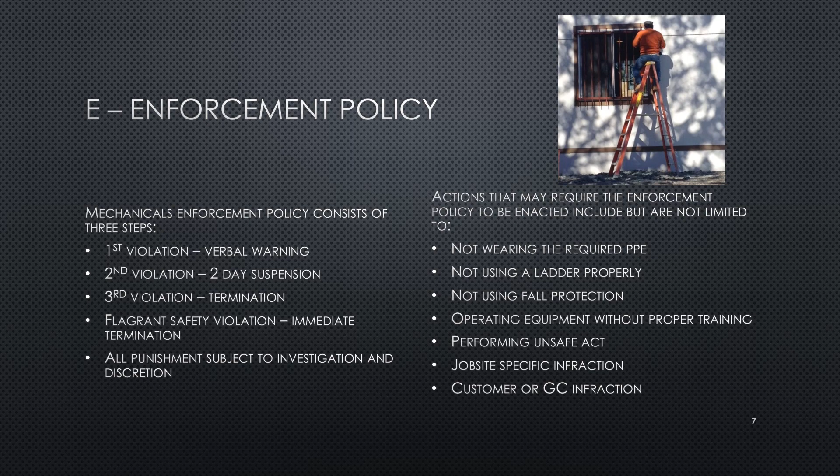Employee safety orientation may include the following: new employee safety orientation, job site specific safety orientation, and or customer specific safety orientation.

Mechanical is required to provide safety training to its employees. OSHA compliance training pertains to these standards: 29 CFR 1910 for general industry and 29 CFR 1926 for the construction industry. Training specific to our company includes new employee safety orientation, daily safety training, high-risk activity training, weekly toolbox talks, task-specific training, and customer or general contractor specific training.

Although uncommon, OSHA may inspect a job site based on the following scenarios: 1, imminent danger; 2, fatalities and catastrophes; 3, an employee complaint; 4, referrals; 5, follow-up visits, and 6, planned or programmed inspections. And fines can range from $7,000 to $129,000.

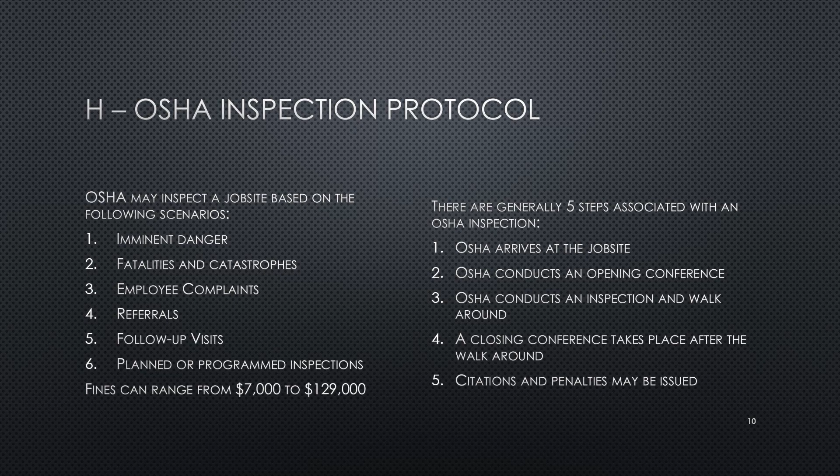There are generally 5 steps associated with an OSHA inspection. 1. OSHA arrives at the job site. 2. OSHA conducts an opening conference. 3. OSHA conducts an inspection walk-around. 4. A closing conference takes place after the walk-around. And 5. Citations and penalties may be issued.

Our employees must abide by our substance abuse policy, which includes the following. Any use, possession, distribution, or sale of illegal drugs is prohibited. Employees are prohibited from being under the influence of illegal drugs or alcohol. If employees are prescribed medication, they must inform their supervisor. Employees must report any suspected intoxicated employees to management and do not operate or possess drugs or alcohol in company or personal vehicles used for company activities.

The following scenarios require drug and alcohol screening of our employees: any prospective employees, any employees returning to work from injury, any post-accidents, reasonable suspicion, complying with contractual agreements, or complying with USDOT regulations.

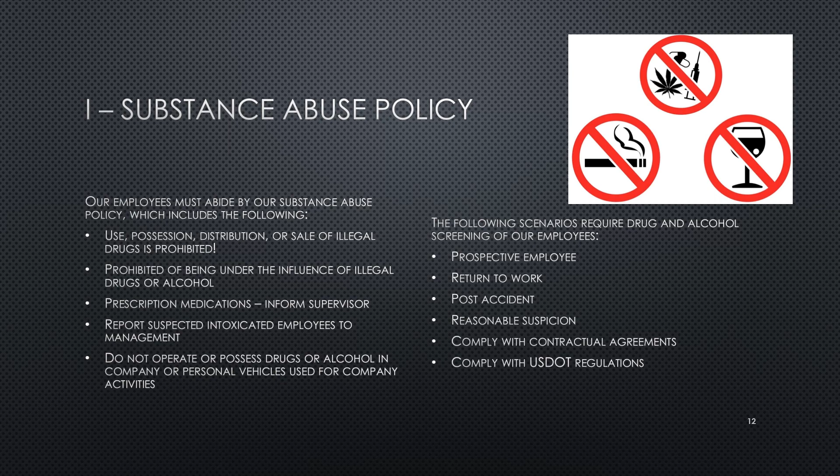We are required by OSHA to keep records of all work-related occupational injuries and illnesses that meet OSHA's recordable criteria, which includes employee fatalities, loss of consciousness, restriction of work duties, transferred to another job task, medical treatment beyond first aid, and these incidences are recorded on our OSHA 300 and 300A log and posted at select job sites from February 1st to April 30th. Safety planning starts at the beginning of a job and is carried through to its completion.

Our pre-job planning process consists of our project managers completing our pre-job safety checklist and activity hazard analyses. On-site job safety planning includes all of the following: morning huddles, weekly toolbox talks, before starting new tasks. Our employees must be involved with the planning process as well as our subcontractors.

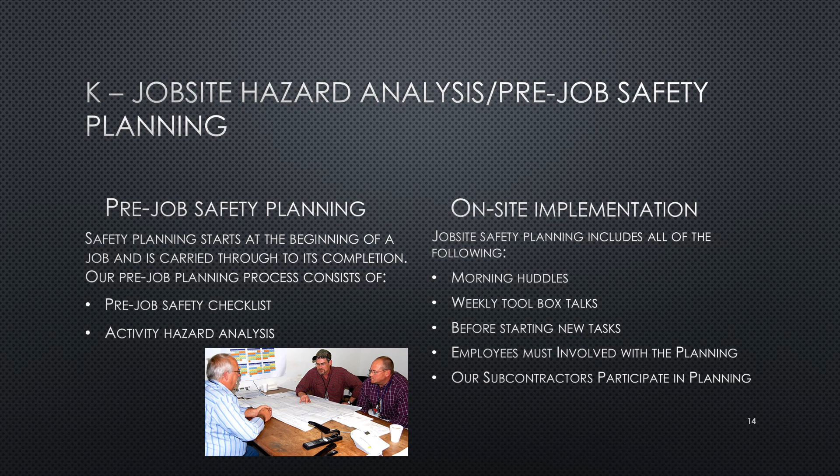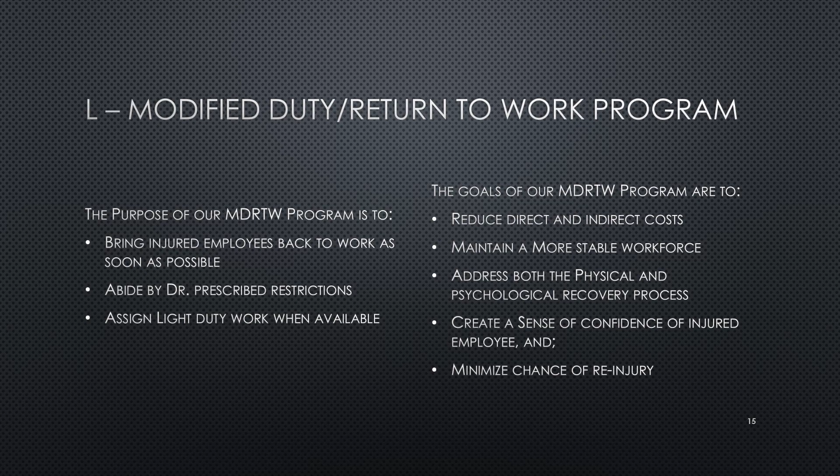The purpose of our modified duty return to work program is to bring injured employees back to work as soon as possible, abide by doctors' prescribed restrictions, and assign light duty work when available. The goals of our program are to reduce direct and indirect costs, maintain a more stable workforce, address both the physical and psychological recovery processes, create a sense of confidence of injured employees, and minimize chance of re-injury.

The purpose of our vehicle loss prevention program is to prevent vehicle-related losses. Drivers are required to meet the following criteria: they must submit to a driver's license background check, they must possess a valid driver's license, and they must comply with all laws and regulations.

Our program tracks dangerous driving behaviors, and if necessary, we may enforce the policy, which may require driving safety training or being removed from one of our vehicles. Driving under the influence of drugs or alcohol is prohibited. Pre-trip vehicle inspections must take place. Company vehicles must be maintained in safe operating condition. Drivers should not exceed rated load capacities or speed limits. Loads must be secured, and accidents must be reported immediately.

The general requirements of our fleet management policy are as follows. Employees must be authorized to operate a company vehicle. Company vehicles are for company use only. Employees must possess a valid driver's license and report all auto accidents and citations immediately. Drivers must make sure that company vehicles are mechanically fit for safe operation, and the outer appearance must be clean and damage-free. Most importantly, vehicles must be operated in a safe manner.

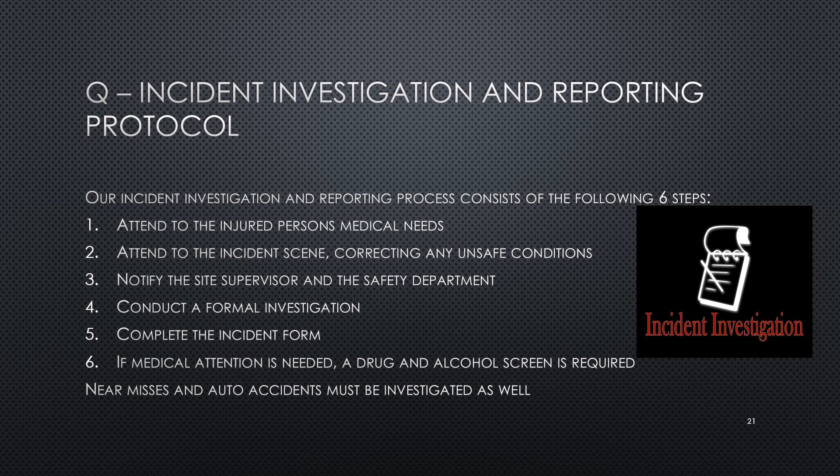First and foremost, we must attend to the injured person's medical needs. Second, attend to the incident scene, correcting any unsafe conditions. Third, notify the site supervisor and the safety department. Fourth, conduct a formal investigation. Fifth, complete the incident form. Sixth, if medical attention is needed, a drug and alcohol screen is required. Don't forget that near misses and auto accidents must also be investigated.

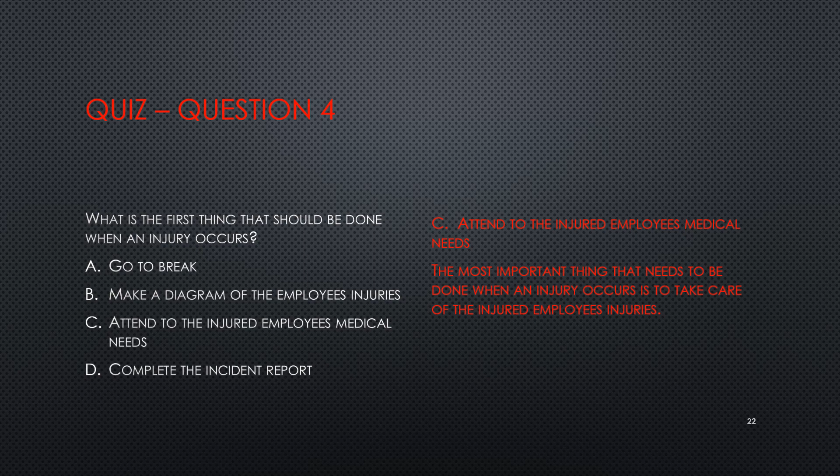For the remainder of this orientation, we will cover company-specific safety procedures.

Acids and caustics. PPE may include splash-proof safety goggles, a face shield, and chemical gloves. Safety data sheets must be available. Adequate ventilation must be used. Respiratory protection may be needed. We must follow all lockout, tagout, and tryout procedures and line breaking requirements. Safety planning may include an activity hazard analysis.

Aerial work platforms. Company requirements regarding aerial work platforms include operators must be properly trained to operate the equipment. Equipment must be inspected prior to each use. Any damaged equipment must be removed. You must work from the platform only and keep the platform clean.

Operate equipment on firm, level surfaces. Have adequate clearance overhead. Always enter and exit lifts from ground level and safely. Close gate and attach chains immediately. Prior to operating, test ground controls to lower lift in the event of an emergency, and always have a rescue plan in place prior to performing work in lifts.

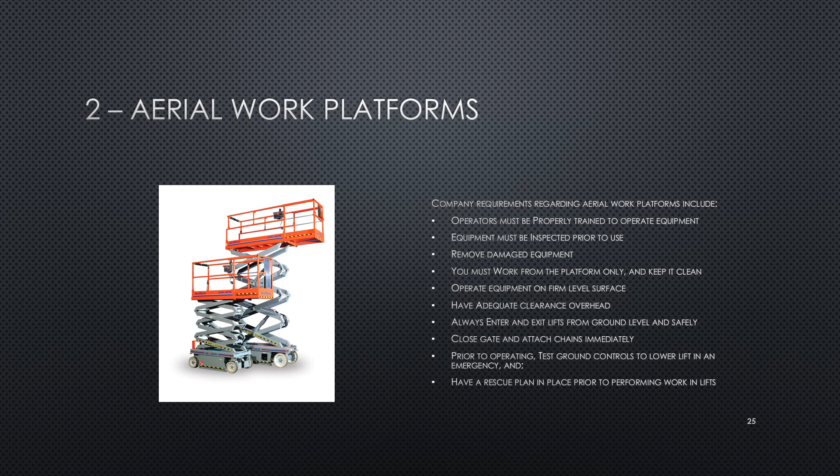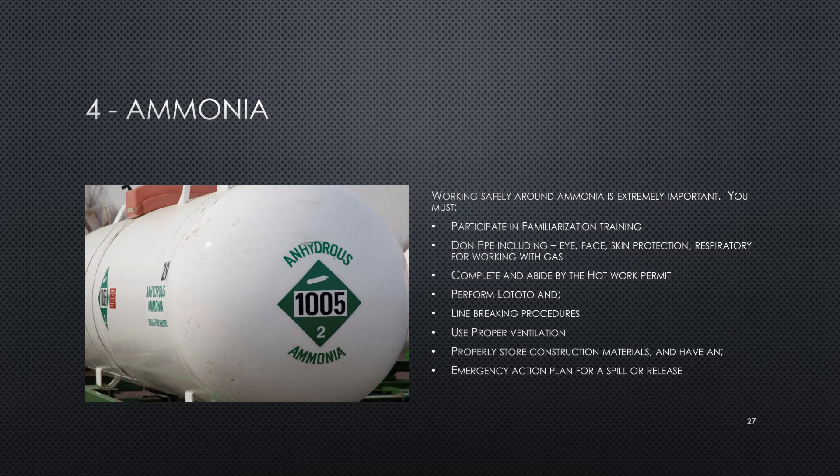Ammonia. Working safely around ammonia is extremely important. You must do the following: participate in familiarization training, don PPE including eye, face, skin protection, and respiratory protection for working with ammonia gas, complete and abide by the hot work permit, perform lockout, tagout, and tryout, and line breaking procedures, use proper ventilation, properly store construction materials, and have an emergency action plan for a spill or release.

Bloodborne pathogens. Performing work in healthcare and wastewater treatment plants and administering first aid and CPR may expose our employees to bloodborne pathogens. To prevent these exposures, first aid kits shall be made available to all employees. Employees are required to participate in annual training. Protection from bloodborne pathogens includes engineering controls, such as using a tool or equipment to prevent exposures, and administrative controls, using PPE. Proper cleaning and disinfecting of exposed areas must take place immediately if an exposure occurs, and a post-exposure evaluation may be needed by a medical provider.

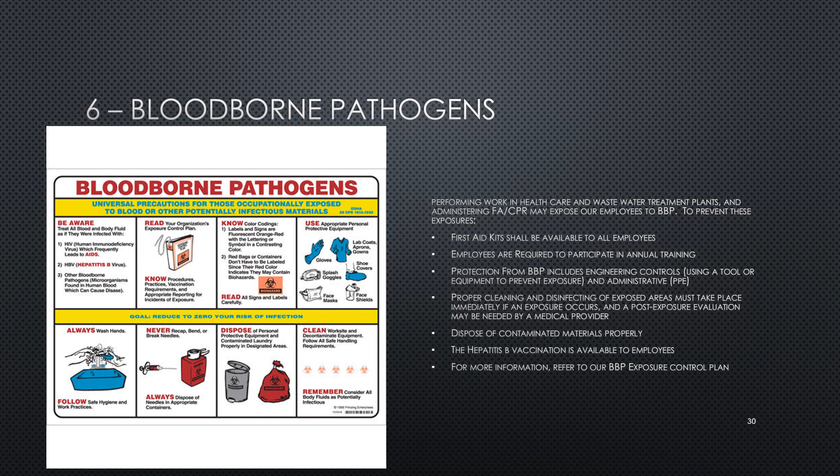Compressed gas cylinders. Gas cylinders can be a projectile hazard if not properly handled. We must do the following: secure cylinders when transporting them, store in vertical positions and secure with chains or a cart and away from flames or heat sources, replace valve protection caps when not in use, use regulators and not damage them, and remove when not in use or in transport. Cylinders shall be equipped with flashback arresters.

All welding equipment shall be inspected prior to each use. Cylinders shall be kept away from electrical current. Oxygen and acetylene cylinders shall be separated by a minimum of 20 feet or by a half-hour rated 5-foot-high non-combustible barrier. We must keep oxygen cylinders away from oil or grease to prevent fires.

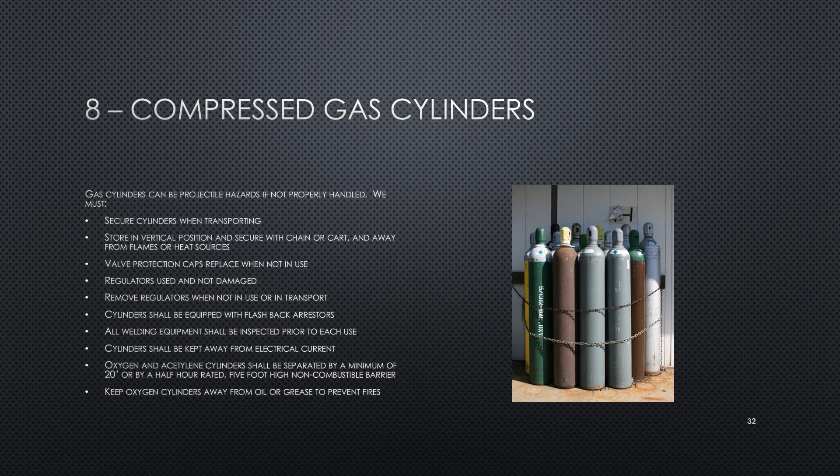Confined space entry. The definition of a permit-required confined space includes having limited means of entry or exit, is large enough for a worker to enter it, and is not intended for regular and continuous occupancy. To enter a permit-required confined space, all crew members must be trained. Spaces must be tested with the use of a 4-gas monitor. A permit must be completed and followed, abiding by the company policy. Employees do not perform confined space entry rescue, they call 911.

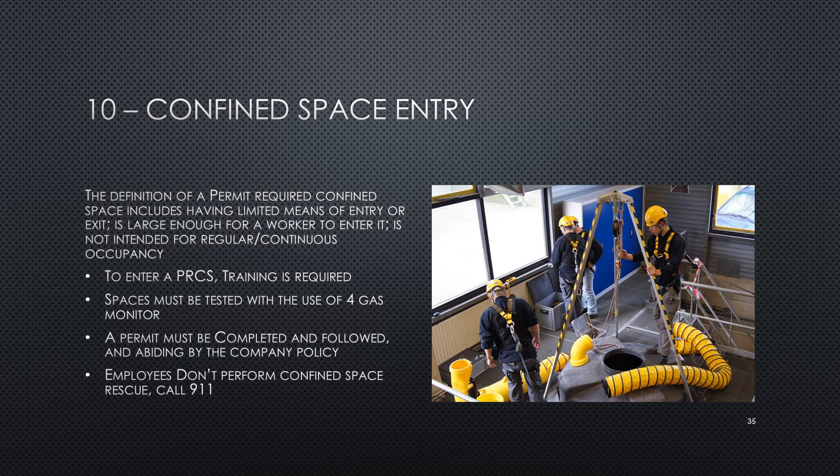Cranes and derricks. Whenever we hire a crane company, we must get a copy of all crane inspections and operator's licenses. The equipment shall not be loaded beyond its maximum rated capacity. A certified rigger and signal person must be used, and employees are not to position themselves under suspended loads.

We must use taglines. We must create a controlled access zone around the crane and lift path to avoid unauthorized personnel from entering the area. Cranes shall be placed on firm and level ground. We must have adequate room made available for rotating crane equipment, and we must stay clear of overhead electrical utilities.

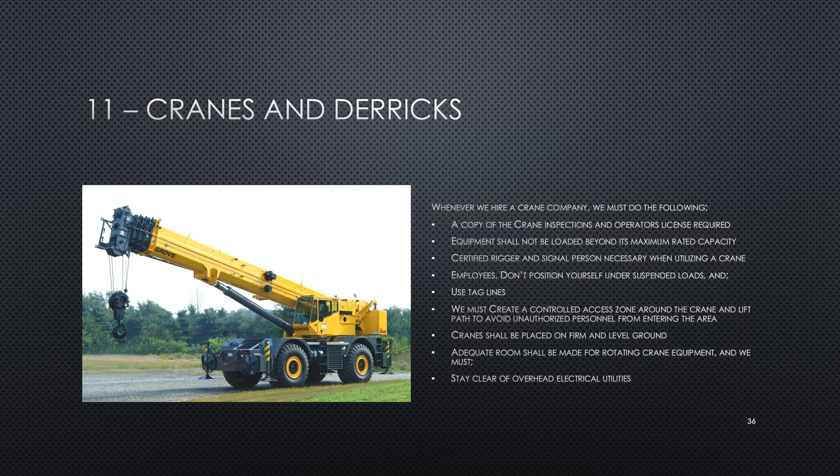Demolition work. When we perform demolition work, we must wear the required PPE, secure materials before breaking free, use mechanical equipment when possible. Hand and power tools must be in good working condition. Inspect all demolition tools prior to use.

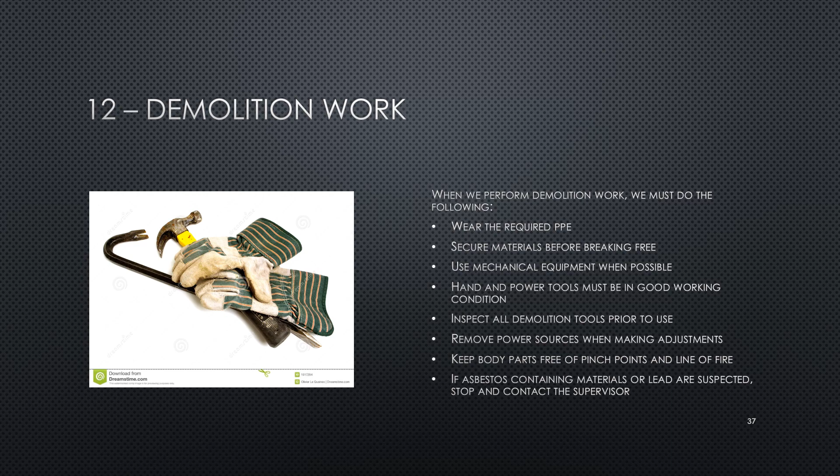Remove power sources when making adjustments. Keep body parts free of pinch points and line of fire. If asbestos-containing materials or lead are suspected, stop and contact the supervisor.

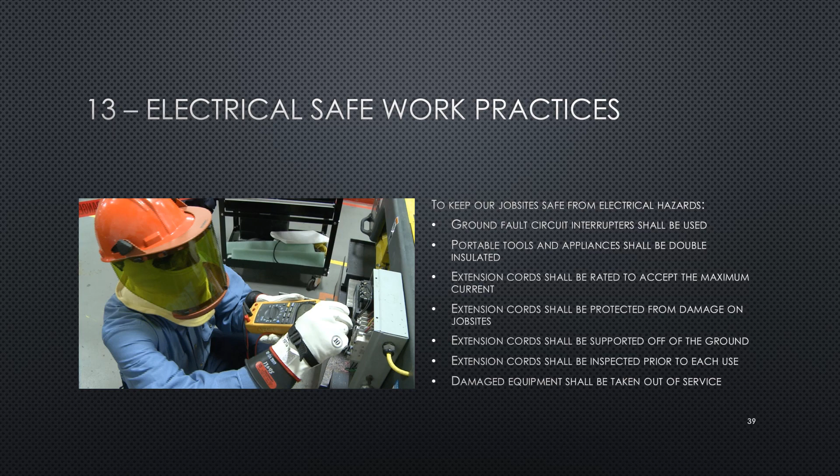Extension cords shall be supported off of the ground, and extension cords shall be inspected prior to each use. Damaged equipment shall be taken out of service.

Emergency action planning. Employees shall be trained on how to respond to an emergency and will be taught how to report emergencies. Emergency scenarios we may encounter are fires, earthquakes, chemical releases, severe weather, catastrophic events, multiple site injuries, and bomb threats or civil threats.

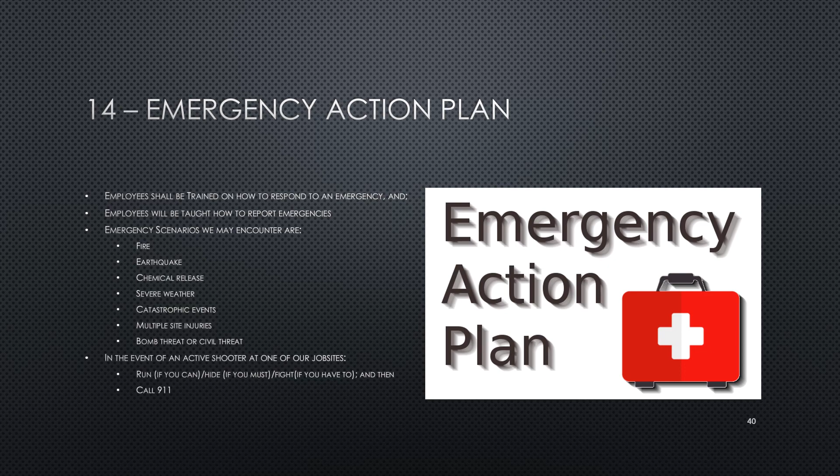In the event of an active shooter at one of our job sites, we must run if you can, hide if you must, fight if you have to, and then call 911.

Emergency response and first aid. Mechanical is required to provide emergency response and first aid services to its employees. Employees are to call 911 when a fellow employee has difficulty breathing or is severely injured.

First aid, CPR, and AED certification training is provided to supervisory employees who serve as a designated first aid, CPR, and AED person on the job site. First aid kits shall be made available to all employees, and the kits shall be inventoried and updated as needed by a competent person.

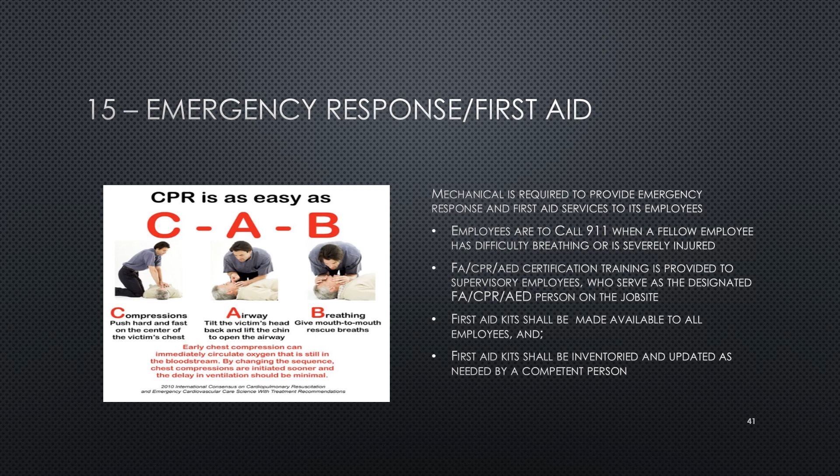Environmental policy. Mechanical has adopted a formal environmental policy which is central to our business objectives. The policy must address the following: it must comply with all relevant laws.

We must salvage and reuse materials when able to. We must purchase used materials when available. We must use materials that reduce waste. We must recycle waste properly on our job sites. We must store materials properly and dispose of materials properly. We must reduce energy use by increasing energy efficiency. We must keep equipment serviced and well maintained, and we must ensure compliance with codes of practice at all times.

Excavations. Excavation work is a high-risk activity that we perform regularly. We must do the following to reduce risks associated with excavations. Workers shall be protected from cave-ins by using bracing, sloping, or trench boxes. We must call Julie prior to digging to avoid contacting buried utilities.

Spoil piles shall be placed at least 2 feet away from the excavation opening. Ladders shall be provided in excavations 4 feet deep or more and at every 25 feet from workers. Shoring and bracing shall be inspected daily. Adequate barricades and signs shall be provided.

No employees may work in excavations alone or where standing water exists, and pre-excavation safety planning is required prior to excavating.

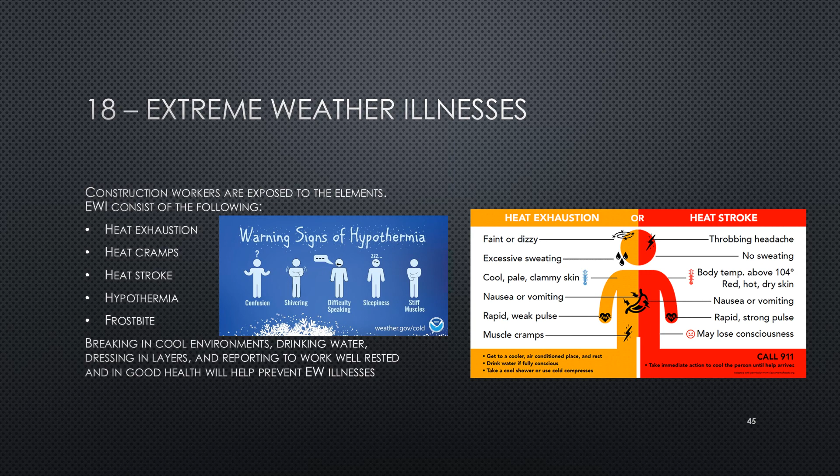Fall prevention and protection. Falls are the leading cause of fatalities and injuries in our industry. Fall protection is required at 4 feet in general industry facilities and at 6 feet on construction job sites. Guardrails, personal fall arrest systems, and hole covers are examples of fall protection we use on our job sites. Fall protection training is required prior to use, and employees are required to inspect fall protection equipment prior to use.

Fire prevention and protection. Fires can injure employees and destroy job sites. We must do the following to prevent fires: smoking is permitted in designated areas only, abide by all warning signs and labels, and proper storage of flammable materials is necessary.

Fire extinguishers must be available. Employees must remove fire hazards. Hot work permits must be completed and a fire watch provided. Use safe welding and cutting practices, and know where emergency evacuation routes are.

Flammable and combustible liquids and materials. To prevent accidents associated with flammable liquids and materials, employees must store portable flammables properly. Containers should be labeled properly. Store away from ignition sources and hot areas, and store away from other chemicals. Use grounding when transferring materials from one container to another.

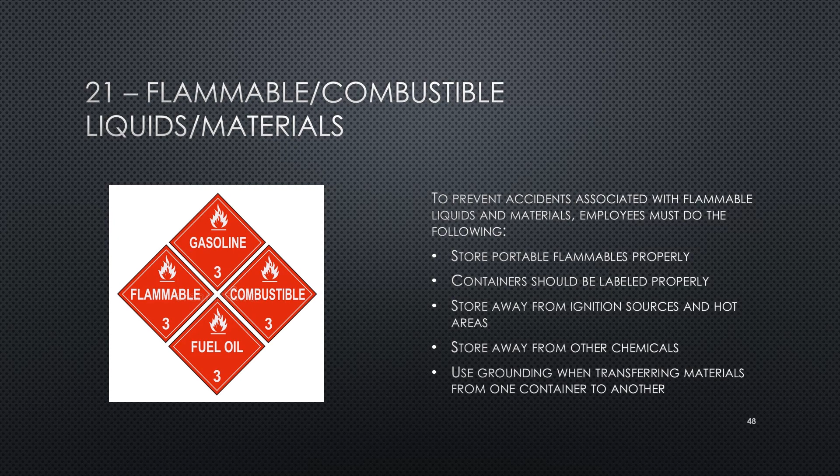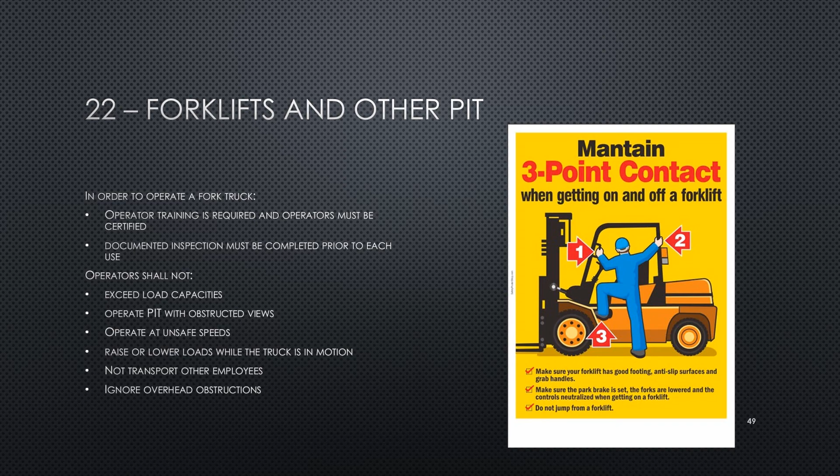Forklifts and other power industrial trucks. In order to operate a fork truck, operator training is required and operators must be certified. Documented inspections must be completed prior to each use. Operators shall not exceed load capacities, operate a truck with obstructed views, operate at unsafe speeds, raise or lower loads while the truck is in motion, not transport other employees, and ignore overhead obstructions.

Grinding. Grinding operations can be dangerous. Prior to operating grinders, tradespersons must inspect grinders before each use, not operate grinders with damaged wheels, only use grinders with guards and handles. Abrasive wheels must be compatible with the grinder and the correct size. Abrasive wheel RPM shall be less than or equal to the grinder's RPM.

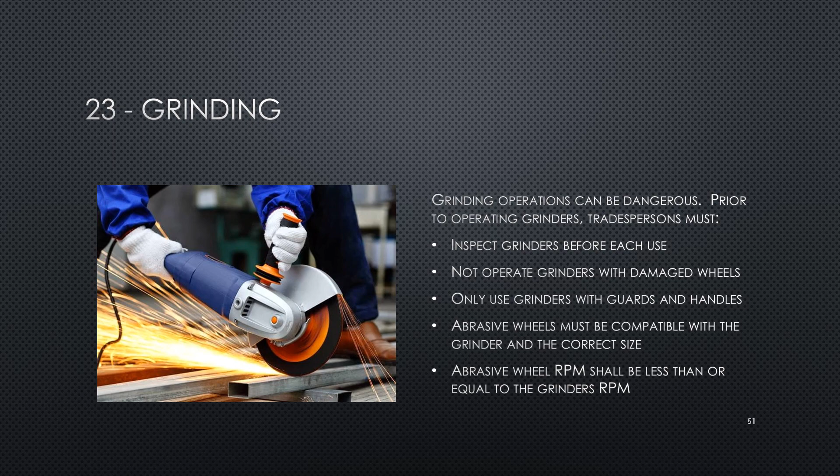Hand and power tools. Our hand and power tool policy requires tradespersons to do the following: remove all damaged tools, inspect tools prior to each use, don't remove tool guards, handles, or other safety devices, follow tool manufacturer's instructions, be trained on how to operate the tool, keep equipment blades sharp, remove power sources when making adjustments to the tools, and keep body parts clear of line of fire or pinch point hazards.

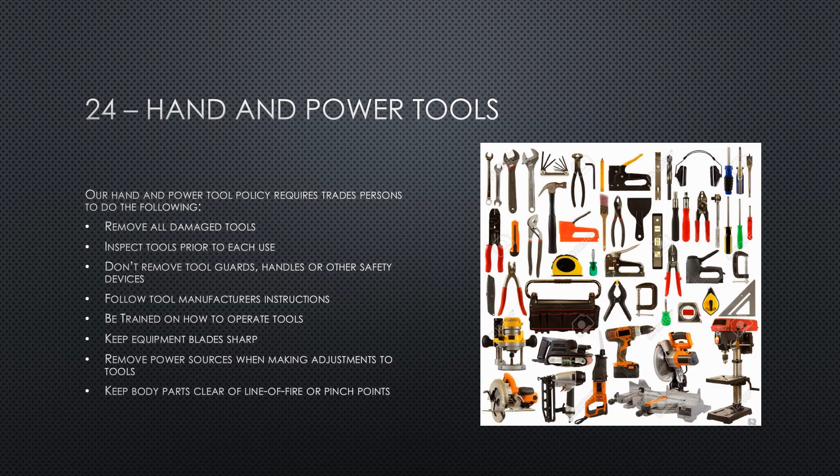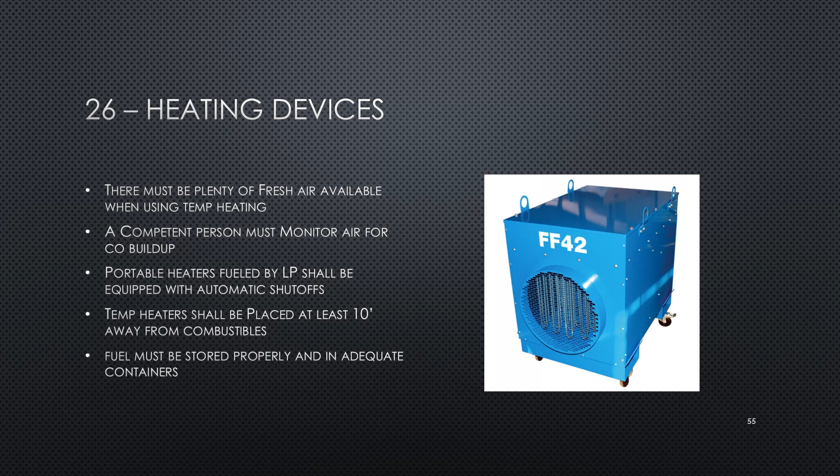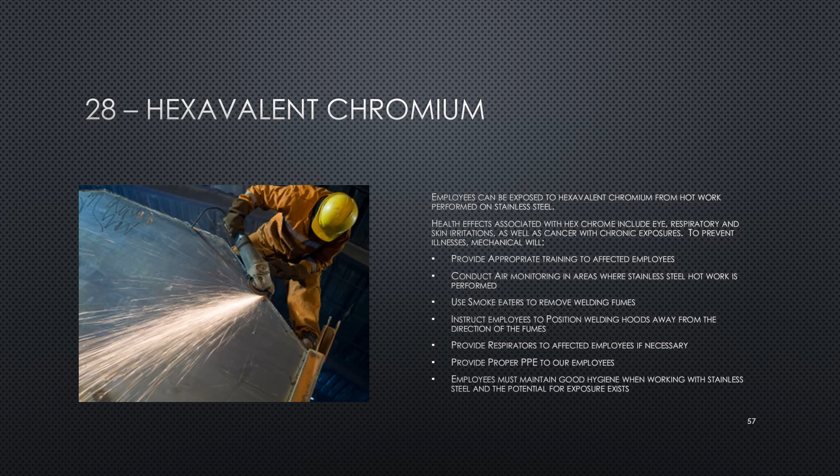Hexavalent chromium. Employees can be exposed to hexavalent chromium from hot work performed on stainless steel. Health effects associated with hexavalent chromium include eye, respiratory, and skin irritations, as well as cancer with chronic exposure. To prevent illnesses, Mechanical will provide appropriate training to affected employees, conduct air monitoring in areas where stainless steel hot work is performed, use smoke eaters to reduce or remove welding fumes, instruct employees on how to position welding hoods away from the direction of the fumes, provide respirators to affected employees if necessary, provide proper PPE to our employees, and employees must maintain good hygiene when working with stainless steel and the potential for exposure exists.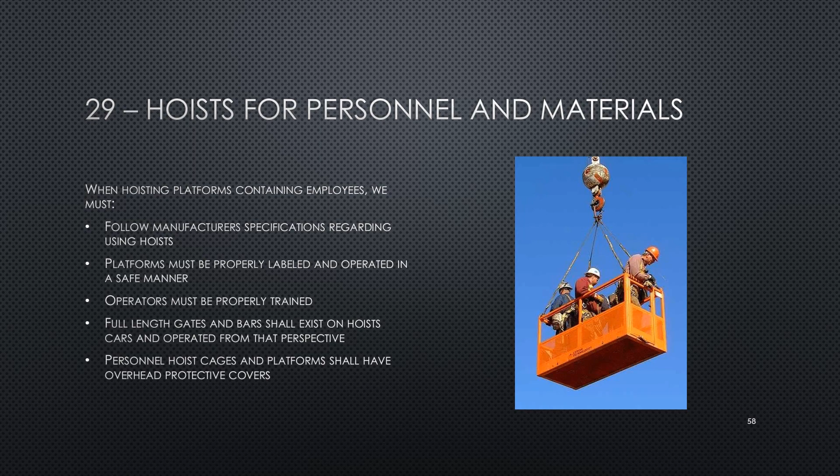Hoists for personnel and materials. When hoisting platforms containing employees, we must do the following: follow manufacturer specifications regarding using hoists, platforms must be properly labeled and operated in a safe manner, operators must be properly trained, full-length gates and bars shall exist on hoist cars and operated from that perspective, and personnel hoist cages and platforms shall have overhead protective covers.

Housekeeping. Maintaining good housekeeping reduces the risk of injury. Employees shall clean as work progresses, store materials in an orderly manner, keep walking and working surfaces clear of slip and trip hazards, clean up spills and slippery conditions, dispose of greasy and oily rags properly, and clean up flammable and combustible liquid spills immediately.

Ladders. Ladders are a tool that we must use in the construction industry to gain access to work at levels we can't reach. Employees must follow these safe ladder use tips: do not use damaged ladders, remove damaged ladders from service, inspect ladders prior to each use, keep ladder rungs clear of mud and debris, use ladders only on firm and level ground. Labels shall be legible. Watch for overhead electrical lines when setting up ladders, and employees shall be properly trained on safe use of ladders. Types of ladders we use in our industry include straight ladders, step ladders, extension ladders, job-built ladders, fixed ladders, and specialty ladders.

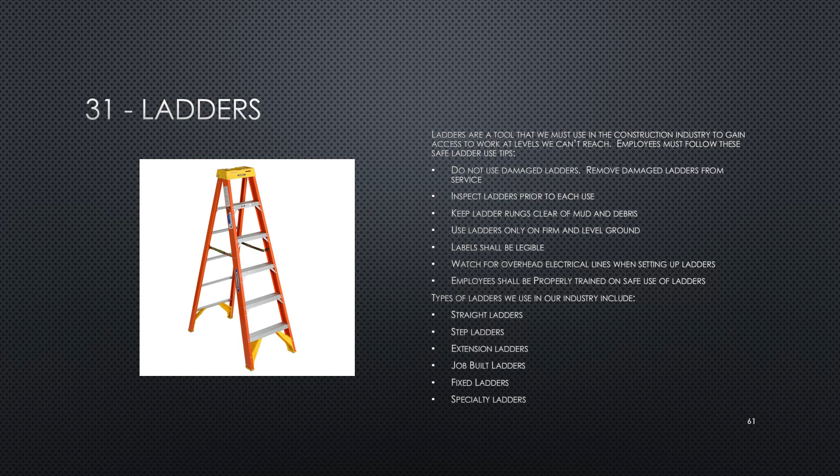Lasers. When working with or around lasers, employees must be properly trained on the safe use of and hazards associated with lasers, don the proper PPE including eye and body protection, create controlled access zones around the work area, use barricades and signage in conjunction with the controlled access zone.

Lead. If construction materials suspected of containing lead are discovered, such as older paint, stop and contact your supervisor immediately. Demolition or modification work are the tasks where the exposure potential is highest. Proper PPE must be worn when working with materials that may contain lead. Employees must have proper training on the health effects associated with lead. Mechanical shall have a lead compliance program available.

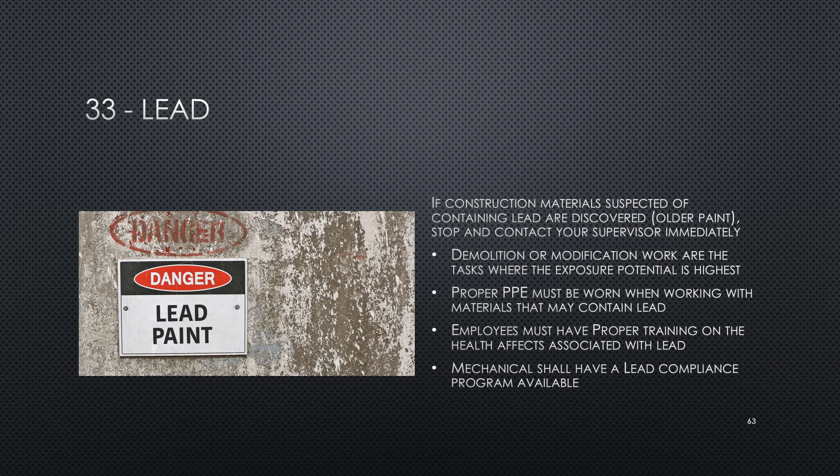Line breaking. When performing line breaking on a piping system, confirm the system is secured against the release of stored energy. Employees must be aware and use caution if flammable and hazardous materials existed in the system. Perform lockout, tagout, and tryout in coordination with the customer and general contractor. Coordinate all activities with the customer's facilities department. Use proper PPE and have a fresh water source available. Flush or purge systems prior to line breaking and performing work, and follow mechanical's line breaking protocol.

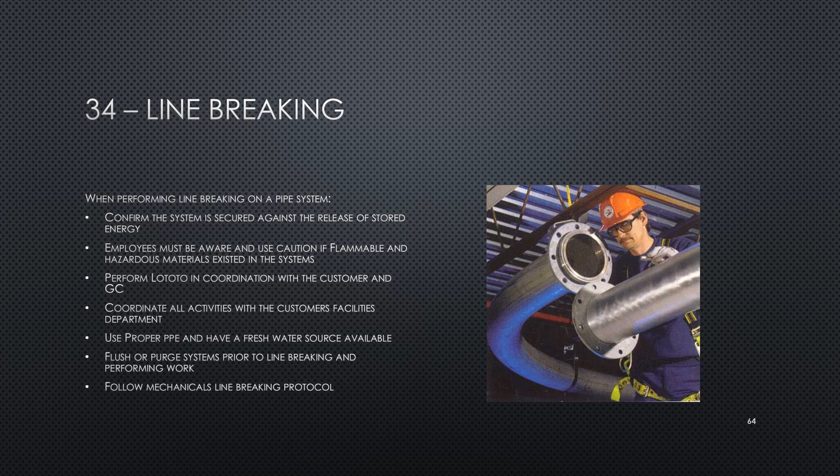Lockout, tagout, tryout. It is critical that we follow lockout, tagout, tryout procedures prior to performing any work or maintenance on equipment with hazardous energy sources. Energy sources include electricity, mechanical, hydraulic, pneumatic, and thermal, and must be locked out, tagged out, and tried out properly. If systems can't be locked out, we must use a tag. Follow mechanical's lockout, tagout procedures. Coordinate with the customer and general contractor. All affected employees must have proper training, and the most important step in the process is to verify equipment is locked out by attempting to start it.

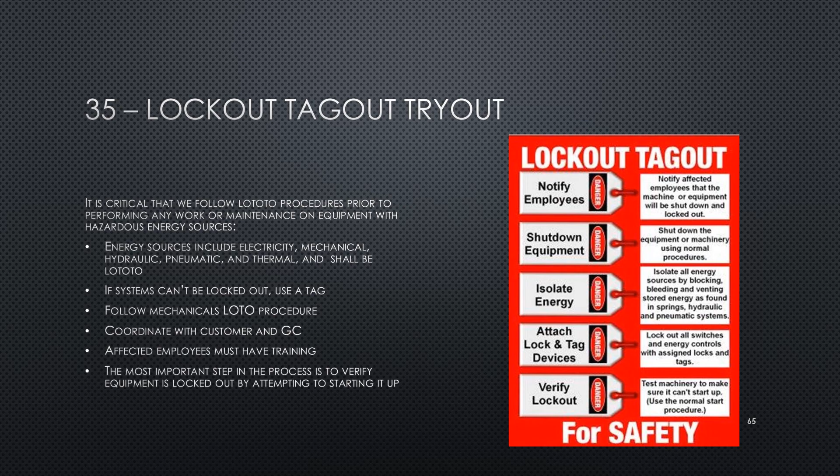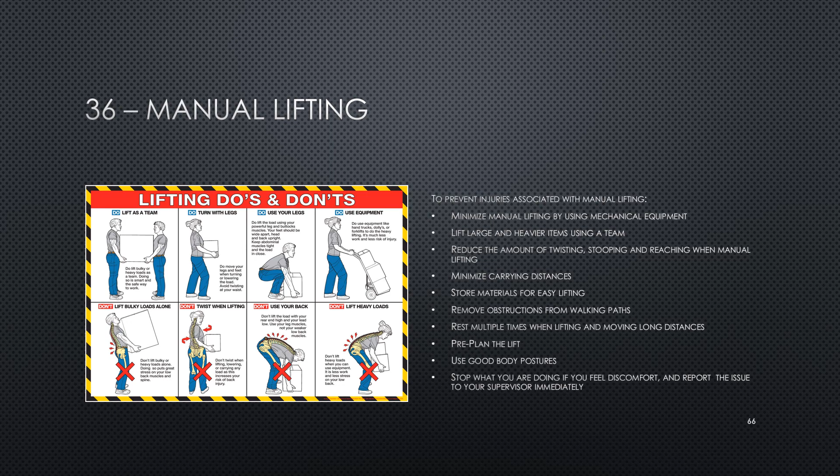Manual lifting. To prevent injuries associated with manual lifting, minimize manual lifting by using mechanical equipment. Lift large and heavier items using a team. Reduce the amount of twisting, stooping, and reaching when manual lifting. Minimize carrying distances. Store materials for easy lifting. Remove obstructions from walking paths. Rest multiple times when lifting and moving long distances. Pre-plan the lift. Use good body postures. Stop what you are doing if you feel discomfort and report the issue to your supervisor immediately.

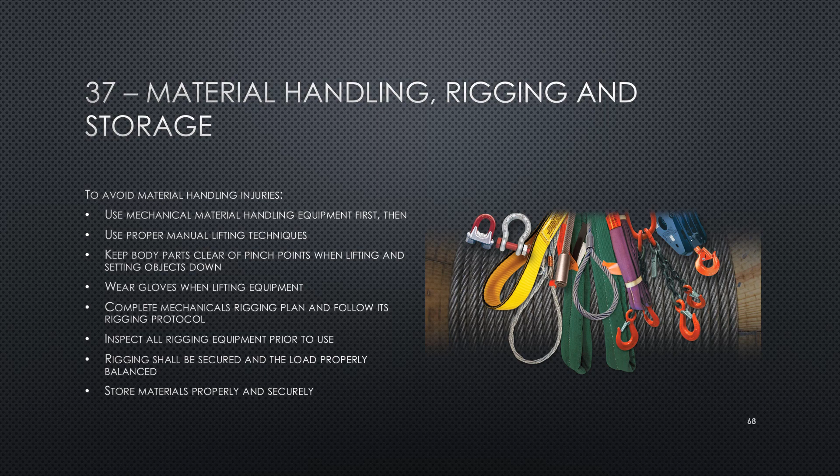Material handling, rigging, and storage. To avoid material handling injuries, use mechanical material handling equipment first. Then use proper manual lifting techniques. Keep body parts clear of pinch points when lifting and setting objects down. Wear gloves when lifting equipment. Complete mechanical's rigging plan and follow its rigging protocol. Inspect all rigging equipment prior to use. Rigging shall be secured and the load properly balanced. Store materials properly and securely.

Motor vehicle and mechanized equipment. In order to operate a company vehicle, a valid driver's license is required. Operators must comply with all federal and state rules and regulations. Hands-free cell phones must be used when operating equipment. A pre-trip inspection must take place. Rated load capacities of vehicles shall not be exceeded. Secure construction materials when transporting, and a CDL may be required and medical evaluation when operating certain types of equipment.

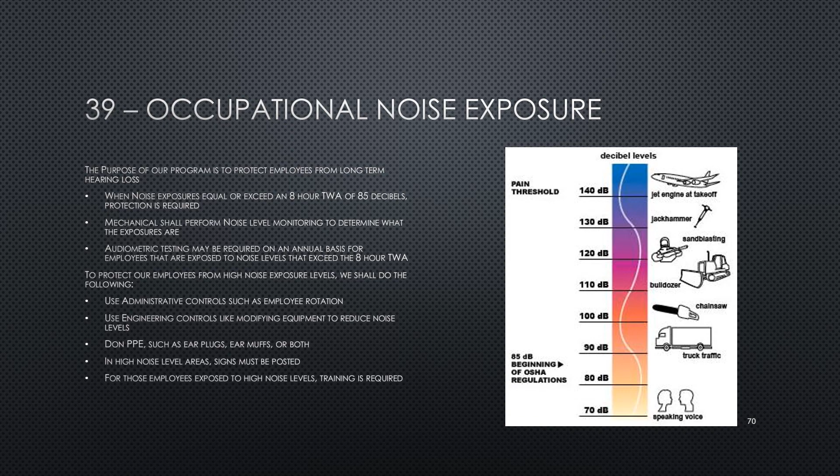Occupational noise exposure. The purpose of our program is to protect employees from long-term hearing loss. To protect our employees from high noise exposure levels, we shall do the following. Use administrative controls such as employee rotation. Use engineering controls like modifying equipment to reduce noise levels. Don PPE such as earplugs, earmuffs, or both. In high noise level areas, signs must be posted. For those employees exposed to high noise levels, training is required.

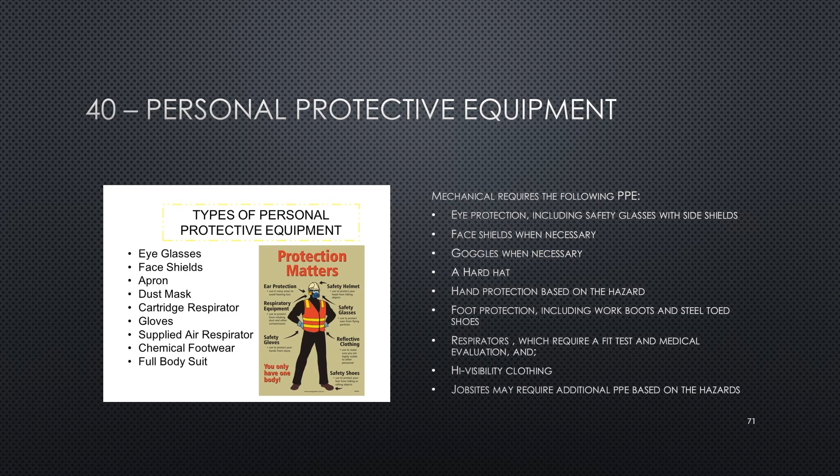Personal protective equipment. Mechanical Incorporated requires the following PPE: eye protection, including safety glasses with side shields, face shields when necessary, goggles when necessary, a hard hat, hand protection based on the hazard, foot protection including work boots and steel-toed shoes, respirators which require a fit test and medical evaluation, and high visibility clothing. Job sites may require additional PPE based on the hazards.

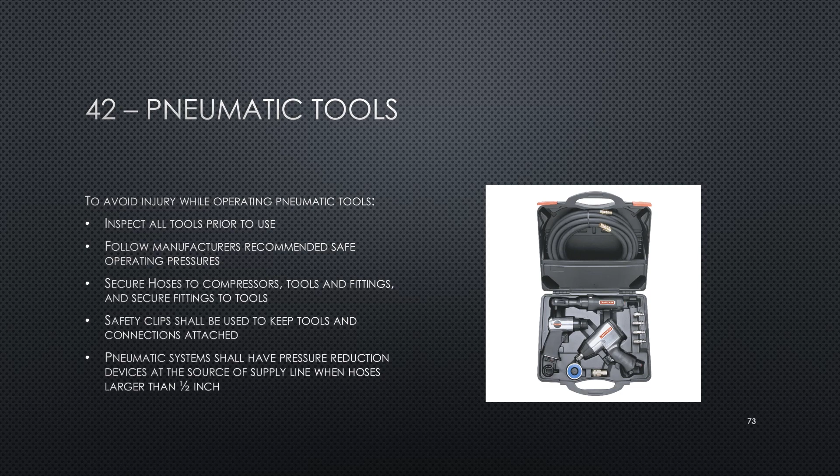Pneumatic tools. To avoid injury while operating pneumatic tools, inspect all tools prior to use, follow manufacturer's recommended safe operating pressures, secure hoses to compressors, tools and fittings, and secure fittings to tools. Safety clips shall be used to keep tools and connections attached. Pneumatic systems shall have pressure reduction devices at the source of supply line when hoses larger than 1/2 inch are used.

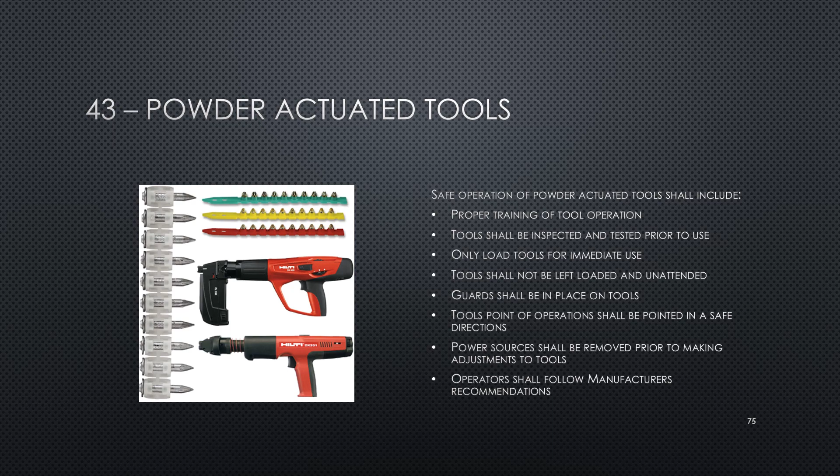Powder actuated tools. Safe operation of powder actuated tools shall include proper training of tool operation. Tools shall be inspected and tested prior to use. Only load tools for immediate use. Tools shall not be left loaded and unattended. Guards shall be in place on tools. Tools' point of operations shall be pointed in a safe direction. Power sources shall be removed prior to making adjustments to tools, and operators shall follow manufacturer's recommendations.

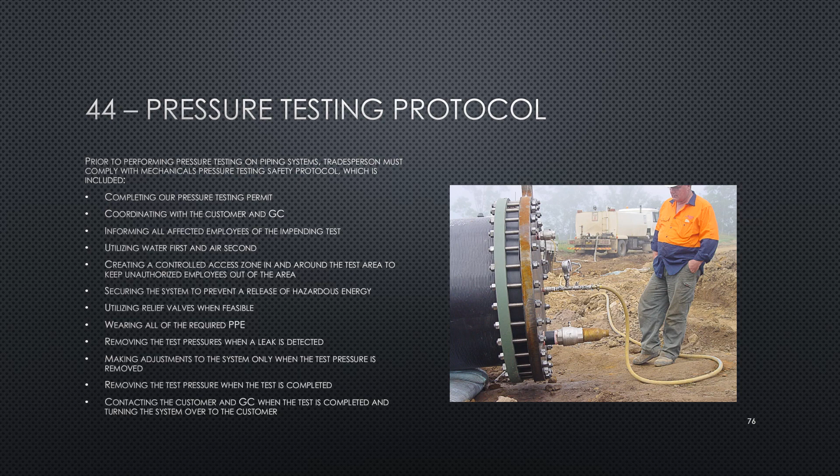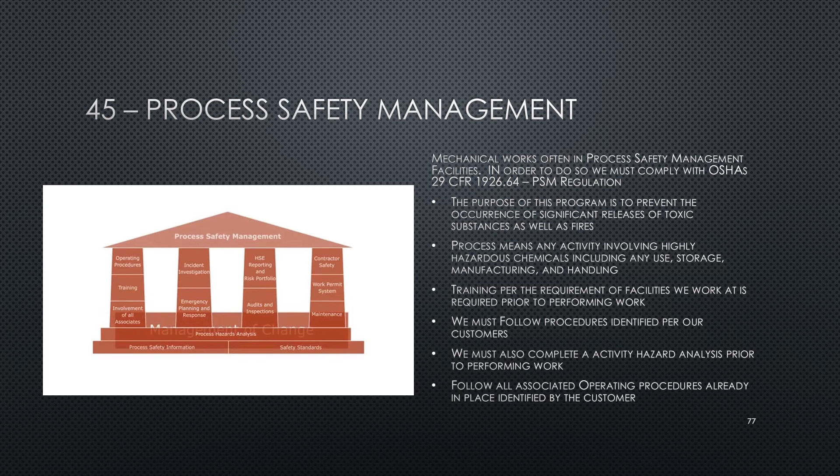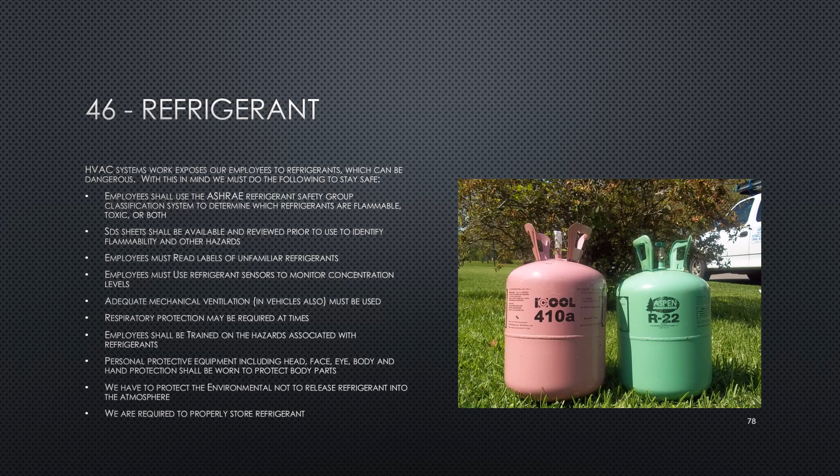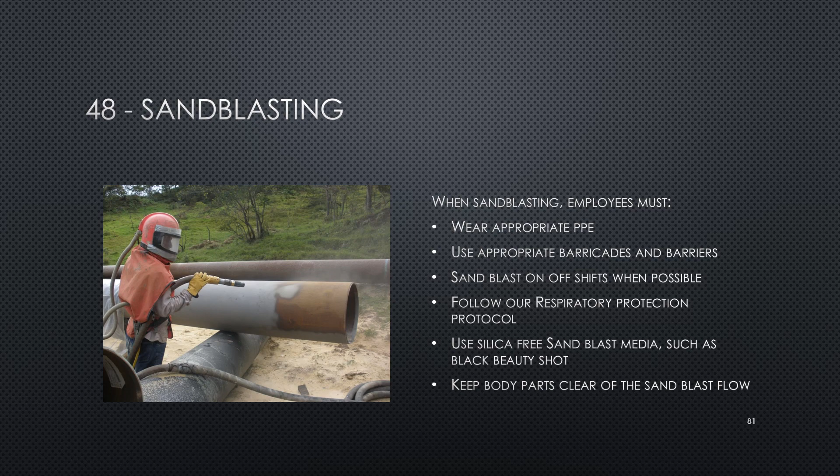Scaffolds. In order to use scaffolding, we must do the following. Scaffolds must be erected by a qualified erector. Scaffold user must go through user training. Inspections must take place prior to use and by a qualified person and tagged properly. Scaffolds shall support 4 times the intended load. Scaffolds shall be placed on solid footing. Scaffolds more than 10 feet tall requires fall protection.

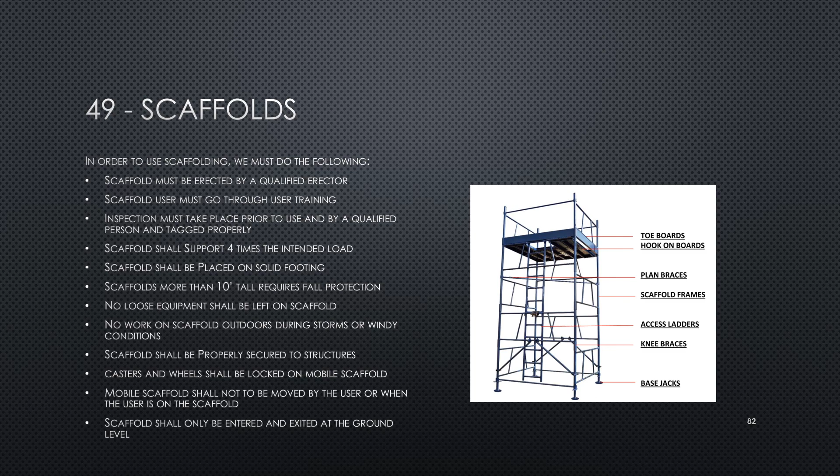No loose equipment shall be left on scaffold. No work on scaffold outdoors during storms or windy conditions. Scaffolds shall be properly secured to structures. Casters and wheels shall be locked on mobile scaffolding. Mobile scaffold should not be moved by the user or when the user is on the scaffold, and scaffold shall only be entered and exited at the ground levels.

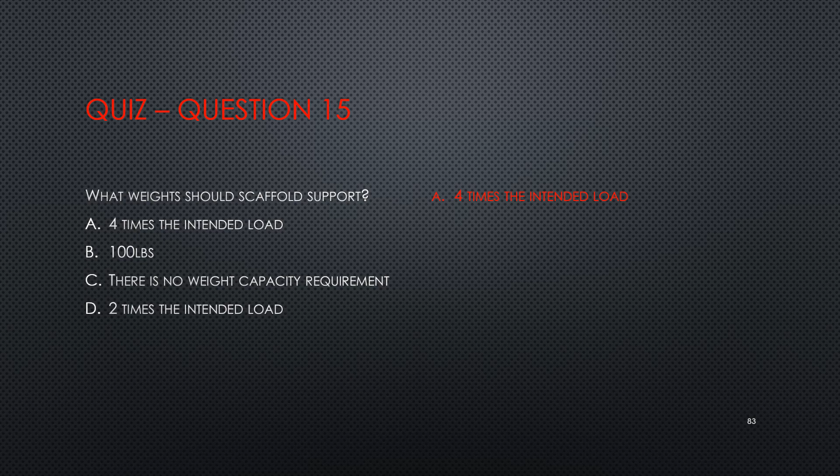Signs, signals, barricades. All affected employees shall be trained to look for warning signs, signals, and barricades. Workers shall obey signs and signals and avoid barricades. Signs, signals, and barricades shall be clearly marked and visible from a distance. Employees shall obey all state and local regulations.

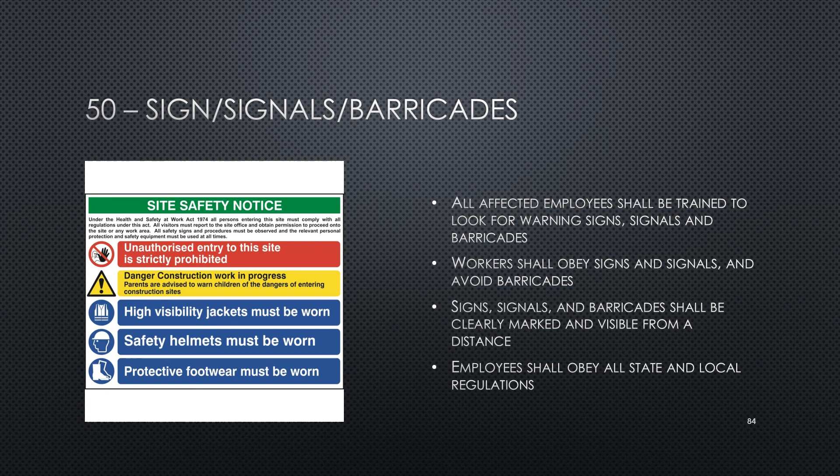Silica. Because exposure to crystalline silica is dangerous, employers must protect their employees by doing the following. The work tasks associated with silica exposure include concrete cutting, coring, drilling, and other trades activities. Tools shall be equipped with dust collecting attachments or with a water supply. Silica waste shall be properly disposed of.

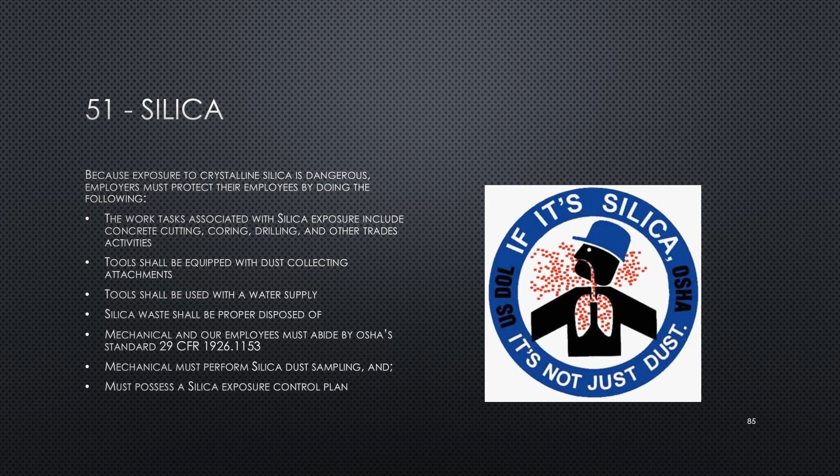Mechanical and our employees must abide by OSHA Standard 29 CFR 1926.1153. Mechanical must perform silica dust sampling and must possess a silica exposure control plan.

Soft tissue safety. Construction workers are exposed to strain and sprain injuries. Strains are injuries to muscles or tendons. Sprains are tearing or stretching injuries to ligaments.

To avoid these types of injuries, use proper lifting techniques. Use mechanical equipment and reduce manual lifting. Use caution when operating, entering, and exiting equipment. Use power tools rather than hand tools when possible. Exercise regularly and stretch prior to activities.

Steel erection. Though we don't employ steel workers or perform steel erection, we do work on construction sites where these activities take place. To protect our employees, we must do the following.

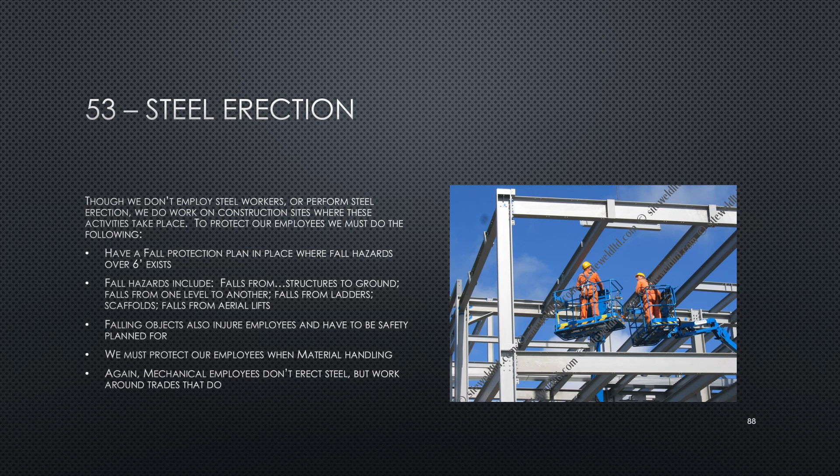Have a fall protection plan in place where fall hazards over 6 feet exist. Fall hazards include falling from structures to ground, falls from one level to another, falls from ladders, scaffolds, and falls from aerial lifts. Falling objects also injure employees and have to be safety planned for. We must protect our employees when material handling. Again, mechanical employees don't erect steel, but work around trades that do.

Utility vehicle operator safety. We use utility vehicles to assist us in moving ourselves and materials around on our job sites. To operate utility vehicles safely, we must do the following.

Safety labels and warnings must be in place on all utility vehicles and must be followed. Equipment must be inspected each day and in good operating condition. Safety features that exist on the vehicles must not be removed or compromised and must work properly. Operators must use seat belts. Operators must operate the vehicle safely, following all job site rules and regulations. Operators must be trained on vehicle operation and reference the manufacturer's operating manual. Speed kills, so avoid speeding and drive per the conditions.

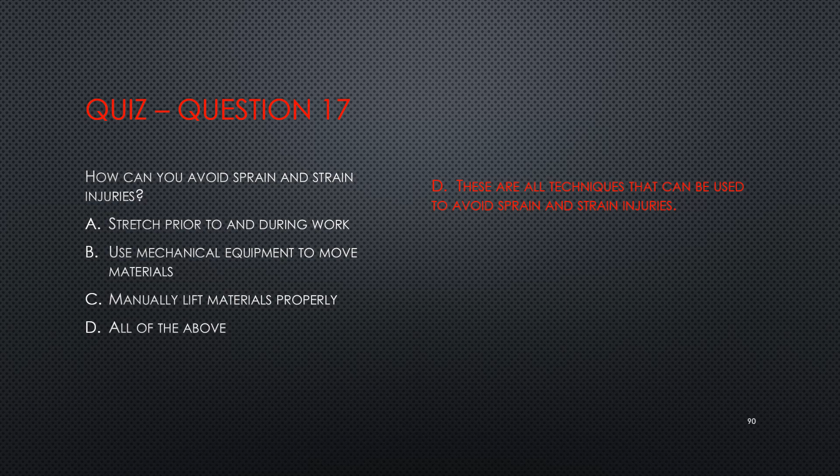Walking and working conditions. Employers are required to make sure walking and working surfaces are safe by doing the following. Walking and working surfaces shall be kept clean, orderly, and in sanitary condition. Walking and working surfaces shall be maintained free of hazards, such as sharp or protruding objects, loose boards, corrosion, leaks,

spills, snow, and ice. Walking and working surfaces must ensure that each surface can support the maximum intended load for the surface. Entry and exits must be maintained in a safe manner. Walking and working surfaces must be inspected often and hazards removed.

Welding, cutting, soldering, brazing. To perform welding, cutting, soldering, and brazing operations safely, employees must do the following. Wear appropriate PPE, including flame-resistant clothing. No clothing shall be worn with pockets or cuffs. Welding helmets with shaded lenses are required.

Welding equipment shall be inspected prior to each use. Proper grounding shall exist on all equipment. Defective equipment shall be removed from use. Cables shall not be allowed to lie in water or oil. Proper storage and use of gas cylinders is required. Adequate ventilation must be used to remove harmful welding fumes.